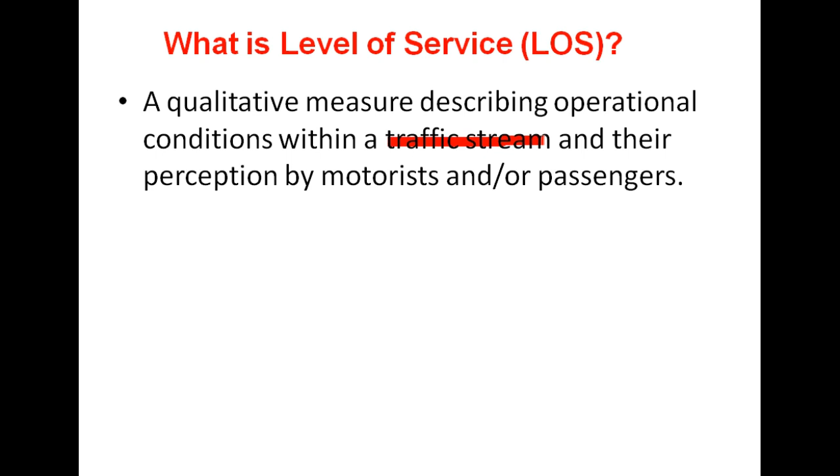First of all, let me define what is level of service. It is a qualitative measure describing operational conditions within a traffic stream and their perception by motorists and/or passengers. So when you travel on a road, how do you perceive the quality of your travel, the level of satisfaction given by your journey? That is level of service. It is a qualitative measure, but indirectly describes the satisfaction of the road users.

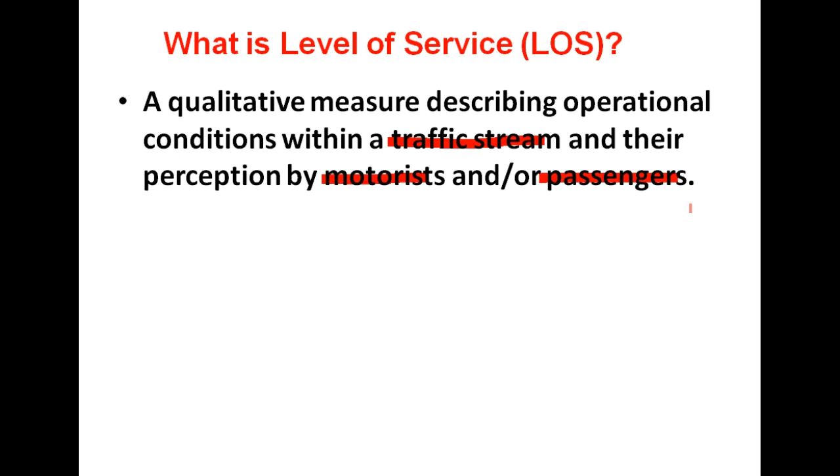And because it defines the satisfaction level, these are the four parameters which are generally included in the definition of level of service: speed and travel time, freedom to maneuver, traffic interruptions, and comfort and convenience. Now here, speed and travel time will be majorly controlled by traffic volume on the road and also by type of highway, whether it is a state highway, national highway, or some district road, because the speed limit depends upon the category of the road.

Traffic interruptions may be because of traffic volume or maybe because of some external factors like intersections. Now here, generally, number of stops per kilometer or total delay caused to a passenger during the journey is considered as the criteria for defining level of service.

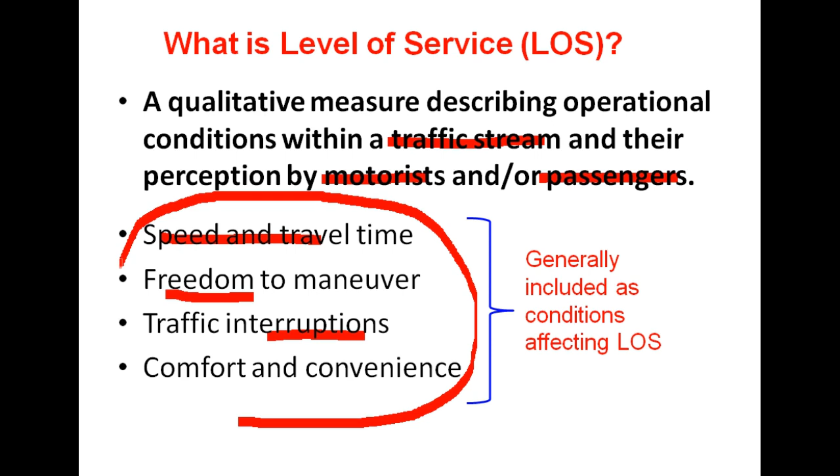Now similarly, comfort and convenience depends upon traffic volume and traffic density, but it also depends on the road condition. A road with potholes or a very high value of unevenness will give an uncomfortable and frustrating ride even on low volume roads. And therefore, these are the factors which are generally considered in defining the level of service on a road.

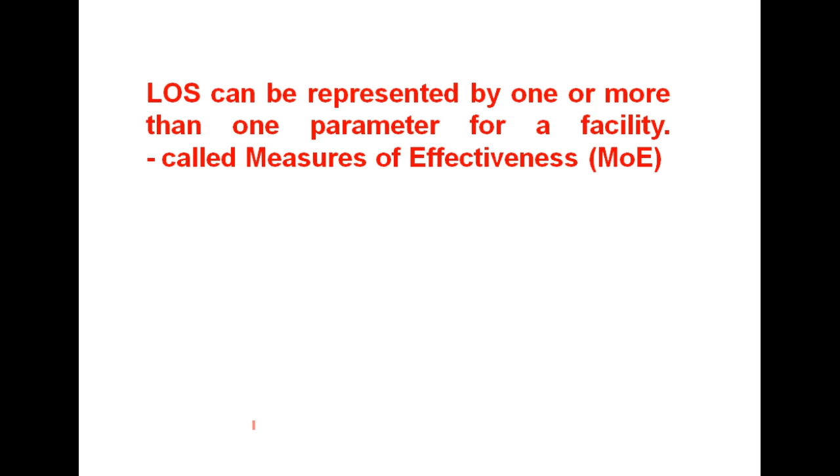Now, this level of service can be represented by either one or more than one parameter. It all depends upon the type of facility, and these parameters are called measures of effectiveness. In general, each facility is evaluated based on 6 levels of service, starting from level of service A to level of service F, where A represents the best operating conditions and LOS F represents the worst condition.

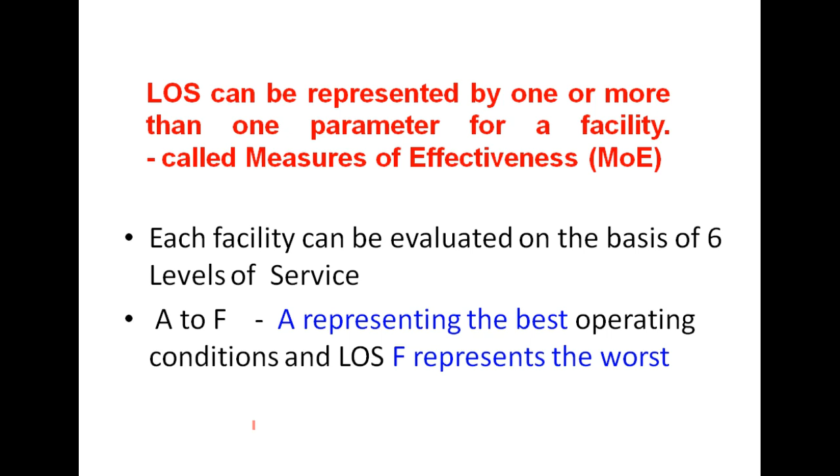Now I will explain the meaning of each of these levels of service through some photographs so that you can appreciate what is level of service A and what is F.

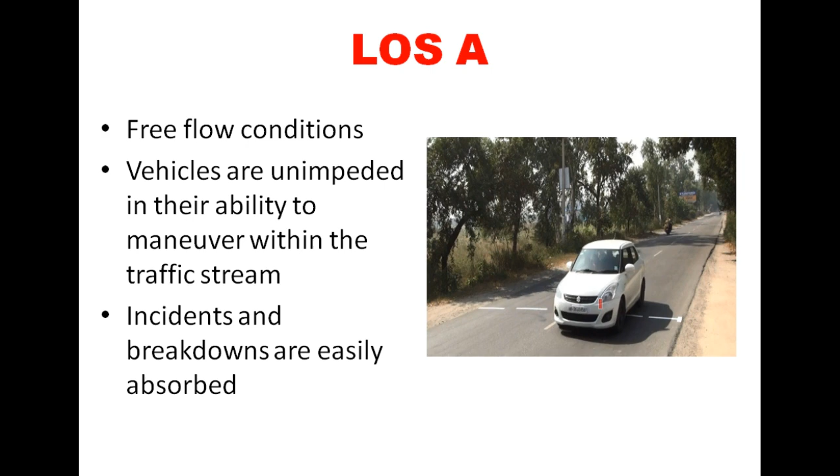Now level of service A: if you see this highway, there is only a single vehicle or maybe two vehicles on the road, and you do not see the next vehicle for a long distance. So every driver here is free to choose his own speed and free flow conditions exist. All vehicles are free to move at their desired speed. They are not impeded by any other factor on the road. Any incident, any breakdown occurring on the highway can be easily absorbed at this level of service.

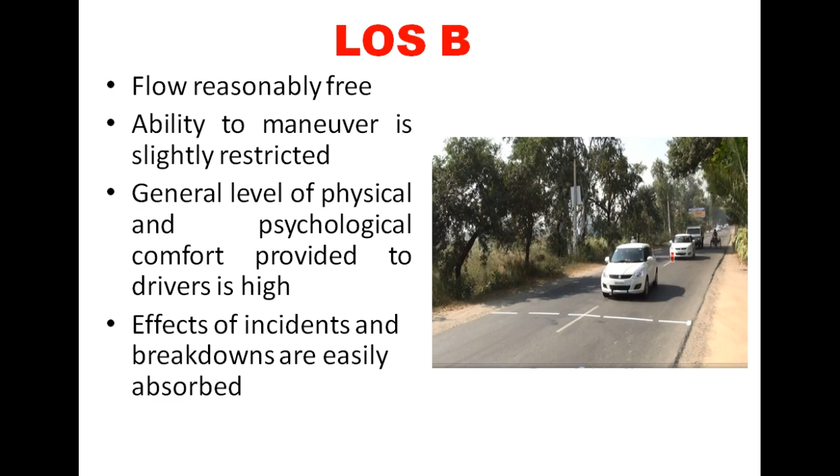When traffic volume increases slightly, this is called level of service B. See the difference between the first photograph and the second photograph. Now you have a number of vehicles, but still the gap between the vehicles is large enough to allow free movement of the vehicles. Ability to maneuver is slightly restricted, but drivers are generally able to choose their desired speed, to travel at their desired speed. Effects of incidents and breakdowns are easily absorbed in level of service B also.

When traffic volume further increases, the distance between two vehicles reduces, and that creates a restriction on freedom to maneuver. Lane changes become difficult because there is no space between the vehicles. When you change the lane, you need some gap between the vehicles, but it's a very restricted gap. At this level of service, minor incidents can be absorbed, but they can cause deterioration in the service. And if this incident is for a longer period, then there may be a long queue behind this blockade.

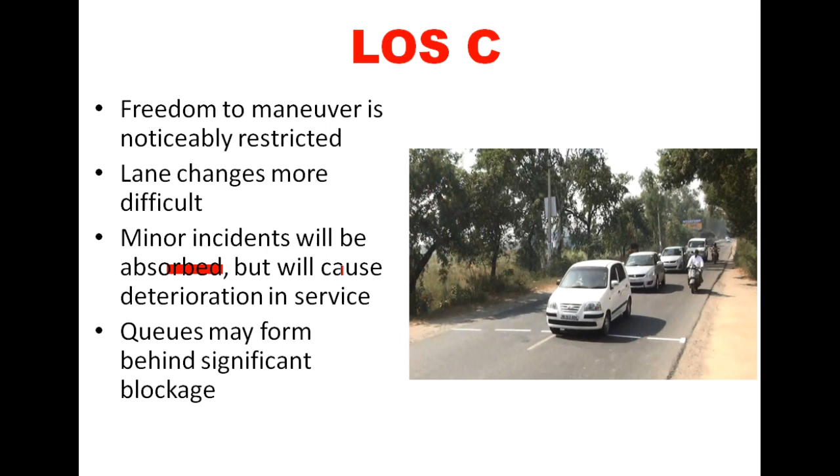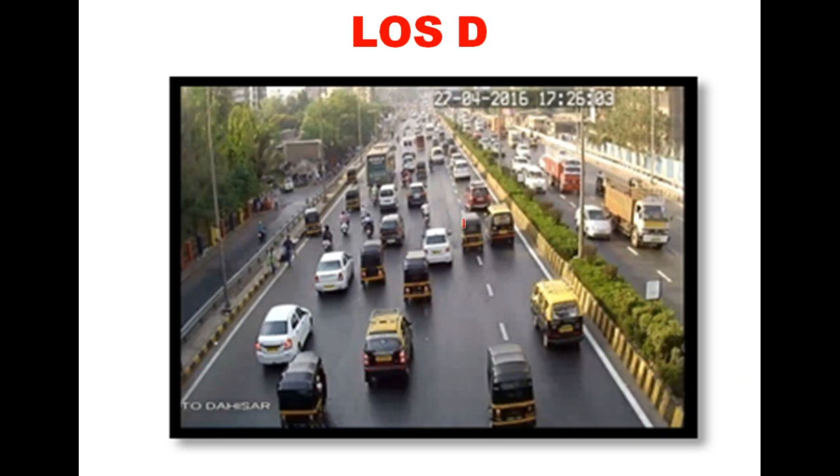At level of service D, although this photograph is taken from a multi-lane highway, the concept remains the same. The density is high, traffic flow changing from stable condition to unstable condition. Unstable conditions basically mean the speed is very low and freedom to maneuver is noticeably limited. Drivers do not have freedom to maneuver because gaps are very small and there is no space between vehicles to either overtake or to lane change. Even minor incidents cause queuing. Traffic stream cannot absorb disruptions. So if there is any breakdown situation, it can lead to very long queues of vehicles.

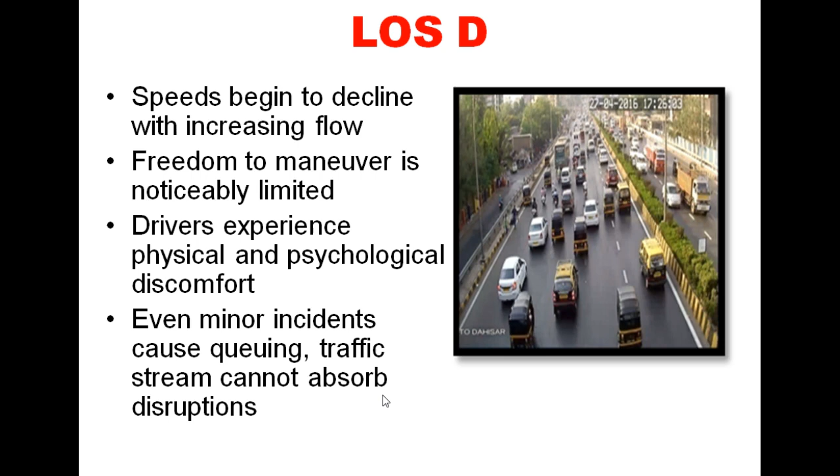At level of service E, traffic moves at capacity. Operations here are very volatile, and there is no gap that can be used by the vehicles either for overtaking or for passing.

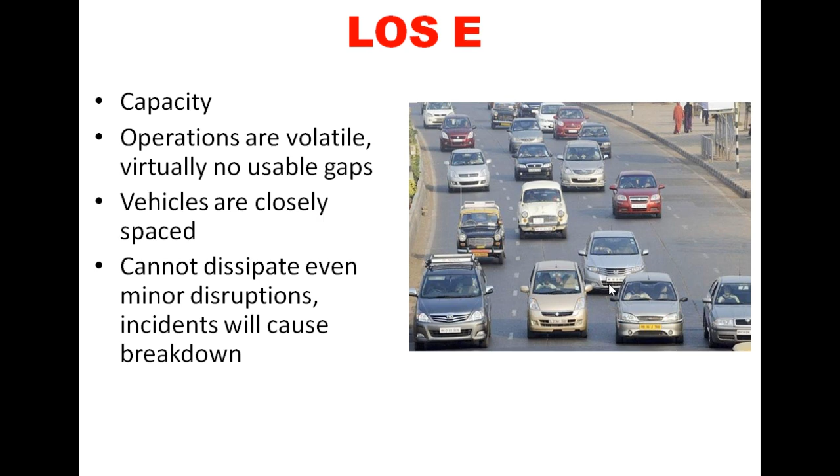Vehicles are closely spaced, and this is the flow at capacity. In extreme conditions, a level of service like this can occur, which we call the breakdown situation or force flow situation.

This occurs when traffic incidents cause a temporary reduction in capacity, or demand exceeds the capacity of the highway. So these are the 6 levels of service.

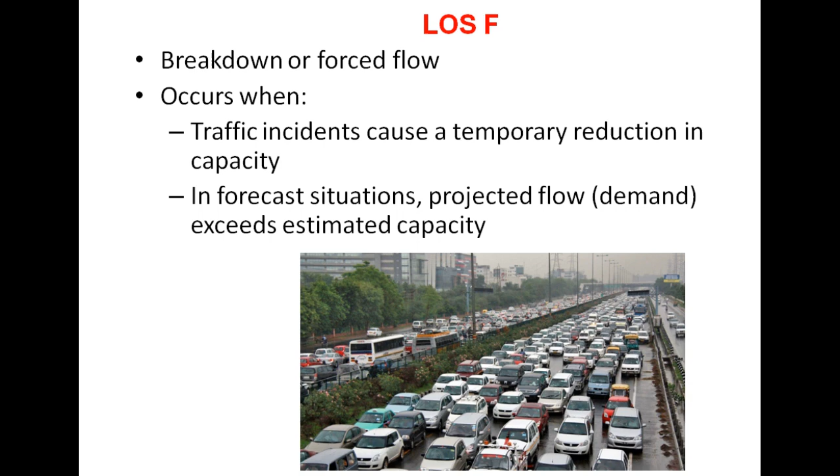Now, the simplest method of understanding the change in level of service with respect to traffic congestion on a road is given in IRC 64/1990.

What it basically suggests is this operating speed versus flow diagram, which is parabolic in nature. As traffic volume increases, the operating speed reduces.

And when operating speed reduces, the drivers start feeling discomfort as well as restrictions. So this is the maximum flow, which we call the capacity of the highway, capacity of the road.

This is defined as level of service E. Now above this portion is stable flow condition, and this is unstable flow condition.

So this part of the speed-flow curve is divided into 6 sections, and each section here represents a level of service A, B, C, D, E, and F.

As I told you, this part of the speed-flow relation is where speed and flow both reduce, and in extreme conditions both can become zero, which we call the jam pack situation or breakdown situation.

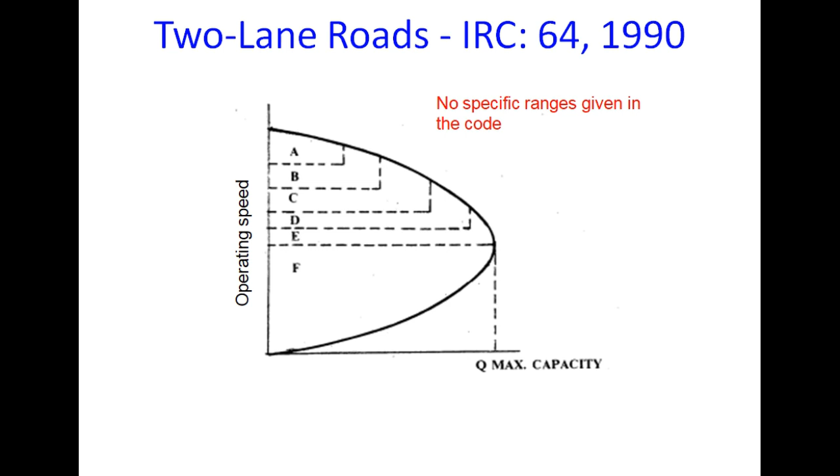If you see the literature, you will find several parameters which define level of service on 2-lane highways, and important among them is percent time spent following, PTSF. I will explain this parameter a little later.

Number of followers and percent free flow speed. There are many more parameters, but volume capacity ratio is no longer in use to define level of service on two-lane highways.

Now, this concept of level of service was introduced in 1965.

You might be knowing that the most comprehensive and most widely acceptable document on capacity and level of service is the Highway Capacity Manual of the United States of America.

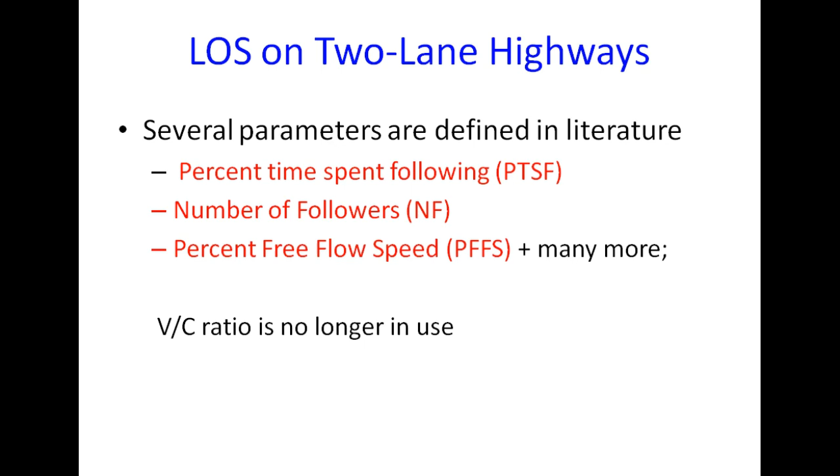This manual was first published in 1950. Its second edition came in 1965, and in this edition, level of service was introduced for the first time.

And for two-lane highway, operating speed and volume capacity ratio were taken as the parameters to define the level of service.

The third edition came in 1985, and here it was thought that V by C ratio is not a good parameter.

Instead, percent time delay was used. How much delay - if you are taking up a journey of 1 hour, out of this 1 hour, how much time do you spend on delay?

Delay means basically when you are not able to reach your desirable speed. You are moving at a speed less than the desirable speed, and average travel speed - these are two parameters which were considered in the 1985 manual.

Then in 2000 it was changed to percent time spent following. On two-lane road, the traffic operation is peculiar.

Peculiar in the sense that the demand for overtaking, demand for passing increases as the number of vehicles on the road increases, but the opportunities to overtake reduce with traffic volume.

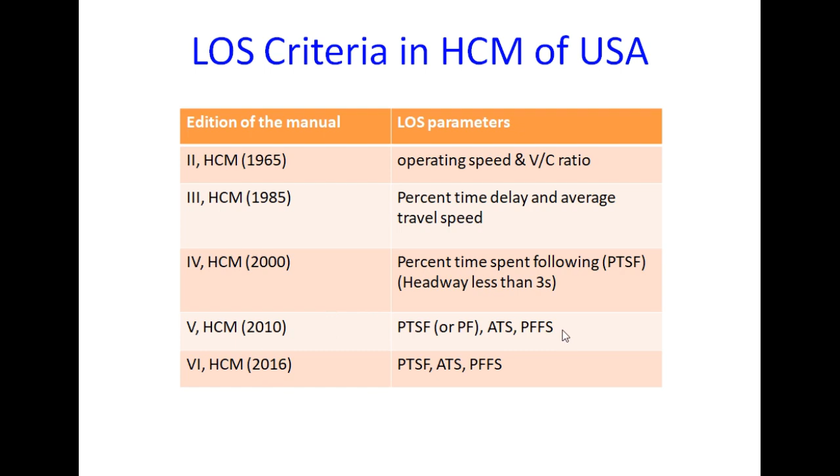And in the latest edition of 2016, these parameters are retained. So this is the level of service criteria in the Highway Capacity Manual of USA for two-lane road.

Average travel speed you can find out from free flow speed: free flow speed minus 0.0125 into total flow on the road, that is, directional flow plus opposing flow.

Directional flow basically means the direction of travel where you want to find out the ATS. So if it's an east-west highway, then whether you are interested in east-west direction or west-east direction, that will become the directional flow.

But you have to basically add both direction flows here. Now this ATS you can find from this graph also - it's a linear variation for different free flow speeds, and for different values of two-way flow rate you can find out the average travel speed.

This is the translation of this equation. Percent time spent following depends upon two-way flow rate, and this variation is exponential.

This variation is exponential, and you can directly read values here, or you can calculate. A and B are two constants, and VD is the directional flow.

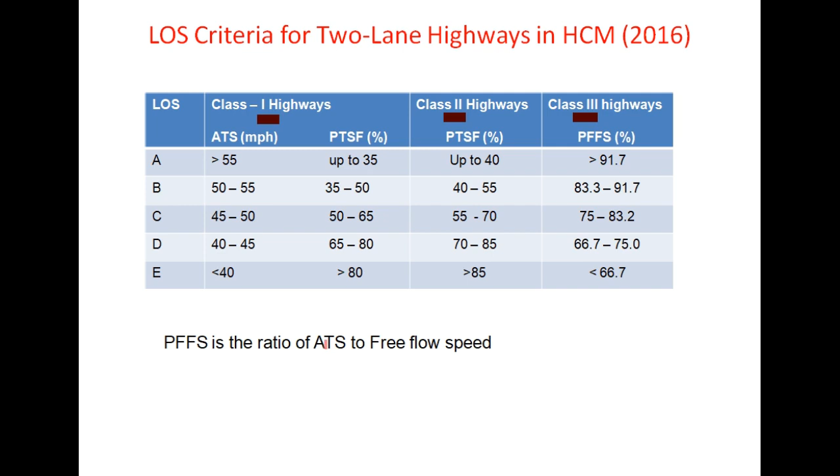And for class 3 highway, it is PFFS. PFFS is the ratio of ATS to free flow speed.

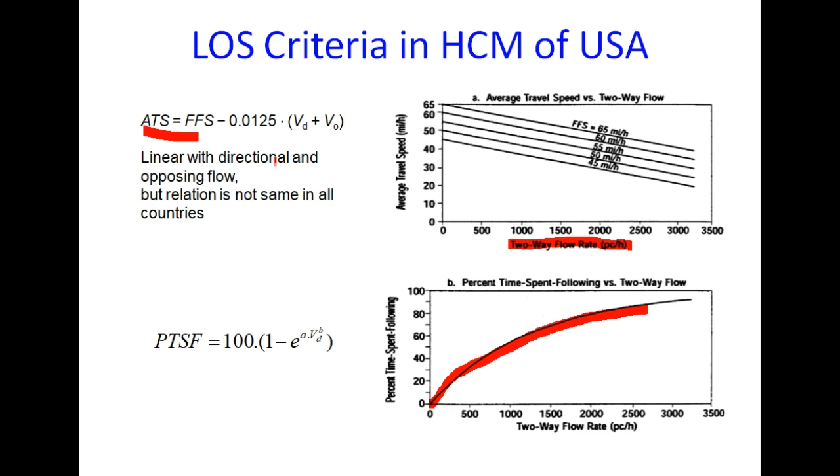So ATS you can calculate from the earlier equation, and free flow speed you can measure in the field.

Free flow speed you can measure, both can be measured, ATS as well as free flow speed. Free flow speed is the speed of vehicles which are moving at headway more than 8 seconds.

Now in Indian Highway Capacity Manual, the level of service parameter given is number of followers divided by the capacity. Because this percent time spent in following, for this parameter, the surrogate measure is the percentage of vehicles in following state, PF, percentage of vehicles which are in following state.

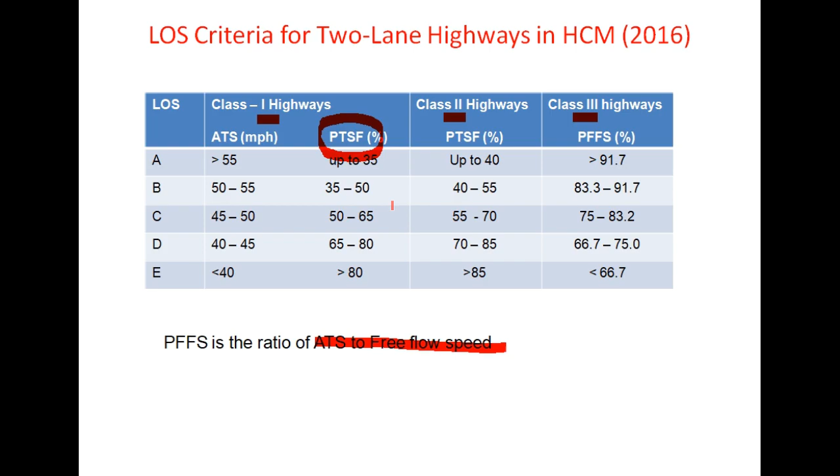During formulation of Indo-Highway Capacity Manual, it was found that number of followers is not really a good parameter because it will depend upon traffic volume, no doubt, but it does not necessarily correlate with traffic congestion, because the capacity of the road depends upon several parameters. We found that capacity of a 2-lane road can vary from 2400 to 3000 PCU per hour. Therefore, it was thought that NFPC, number of followers divided by the capacity of the road, is a better parameter to explain the level of service on 2-lane roads in India.

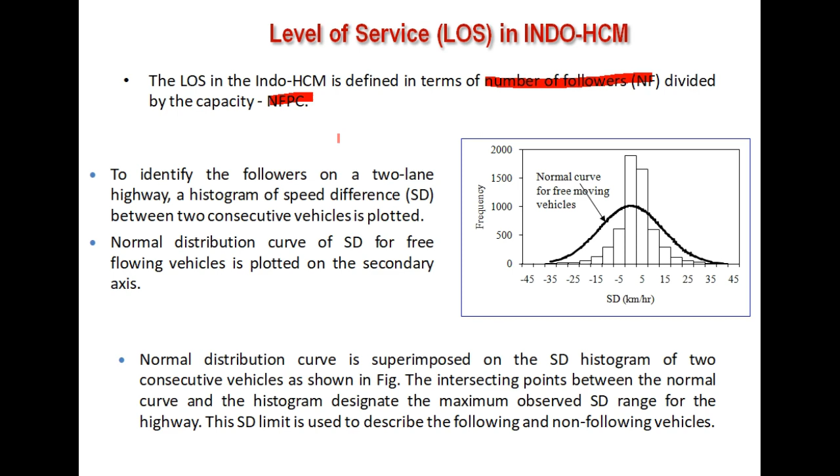The method is given in the manual for how to determine this number of followers. The simple equation provided in the manual is that if you know the two-way traffic volume in PCU per hour, you can use this equation to calculate number of followers in the traffic stream. Number of followers will depend upon the critical gap - what should be the headway, what should be the gap between two vehicles when you call a vehicle following its leader. And that critical gap also depends upon the traffic volume.

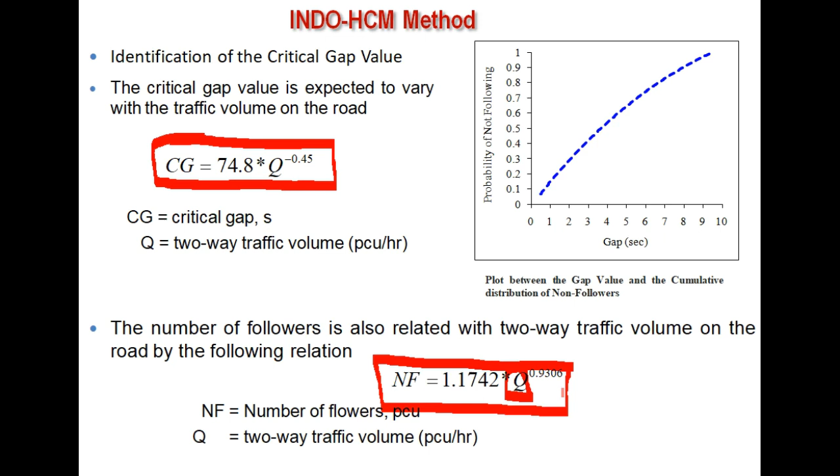This equation is used to calculate the critical gap, and this equation was then converted into number of followers. So number of followers divided by the capacity of the road will give you the NFPC, and these are the ranges of NFPC. Because in India, volume capacity ratio has been used for a long time to define LOS criteria, corresponding to each NFPC, a range of V by C ratio is also suggested in the manual for the convenience of field engineers.

Now let us take one example to illustrate how LOS is determined by Indo-Highway Capacity Manual method as well as by US Highway Capacity Manual method. A section of 2-lane road in a plain terrain has traffic volume of 900 PCU per hour. The directional split is 50-50. The carriageway width is 7 meter with 1.5 meter earthen shoulders. These parameters, these conditions, are required to determine the capacity of the road.

Estimate the level of service as per Indo-HCM method - this is the first part of the question. Now the second part is that if free flow speed on the highway is 95 km per hour, or you can say 60 miles per hour, find out the LOS as per US Highway Capacity Manual of 2016, assuming highway to be a class 3.

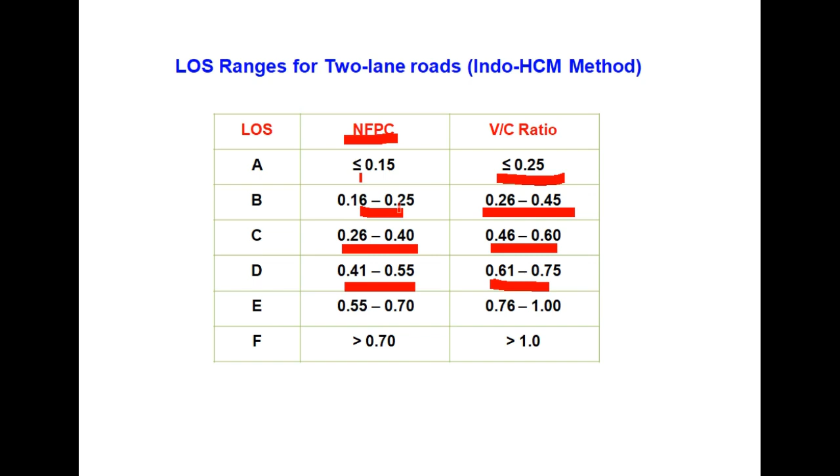For a 7 meter wide road, 1.5 meter earthen shoulder and 50-50 directional split, this is almost a base condition, and for base condition the capacity value given in highway capacity manual is 2946 PCU per hour. Therefore NFPC is 0.224, and this NFPC is in the range of 0.16 to 0.25, and therefore level of service is B.

Now if you see from the consideration of volume capacity ratio - volume here is 900, capacity is 2946, and therefore V by C ratio is 0.305. According to this table, it is again in the range of 0.26 to 0.45, and therefore LOS B.

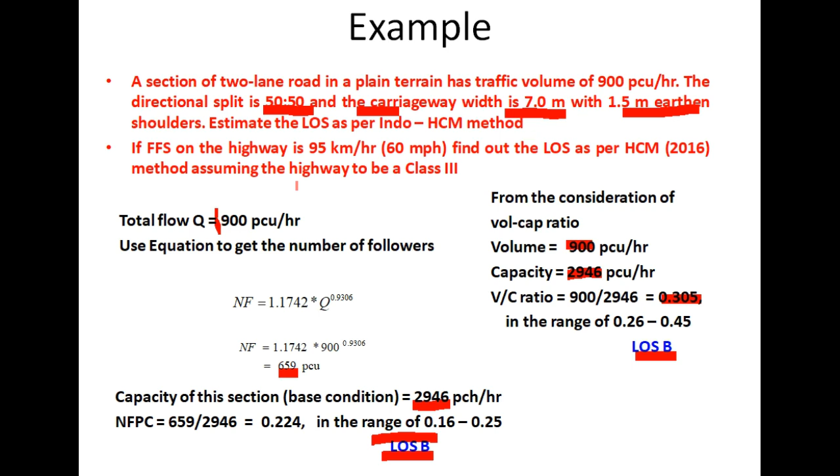So as per HCM, this is level of service C.